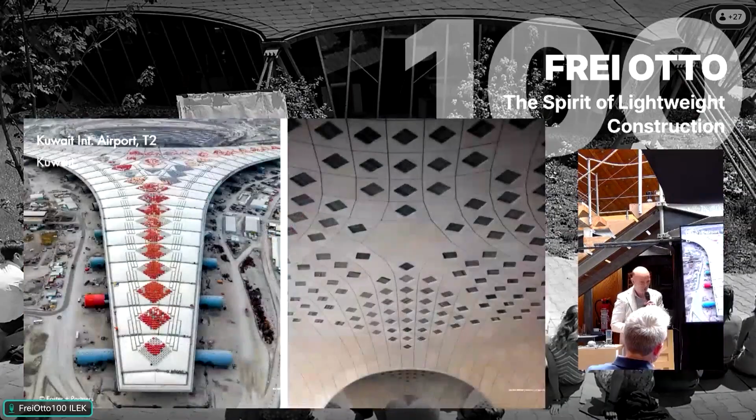And that was the basis for the next generation. The next generation is a parametric design from Foster and Partners with a pretty big shell roof, and I think we all agree in this space, or most of us at least, that shell structures are a very, very efficient system.

One of the issues about building shell structures nowadays is the formwork and the scaffolding on top of the formwork. So here we don't have scaffolding, just adaptive formworks. There's a big effort in parametric engineering up to fabrication next to the site. So the 37,000 panels of concrete, this time 16 centimeters thick, and this shell has a 100-meter span. There's a trick about it I'm going to tell you right away.

They've been produced right next to it, so this is a zero-kilometer fabrication. The shop has already been dismantled, you cannot see it anymore. The concrete structure is complete, no waste out of the formwork, just an adaptive hydraulic cylinder generating the form. It is economic for that kind of building.

Now, of course, we can argue and question, is that a one-of-a-kind structure? I think it's something that can be discussed later on. Can we reduce the level of complexity and bring it to other kinds of projects? I believe yes. But these projects have the legitimation, because they allow us to develop solutions and methods that can later be reduced and applied to simpler things where there isn't the frame, at least not the financial frame, to deal with that. We didn't have the time frame to make that much development. So this is just to provide the background and the link to the practice.

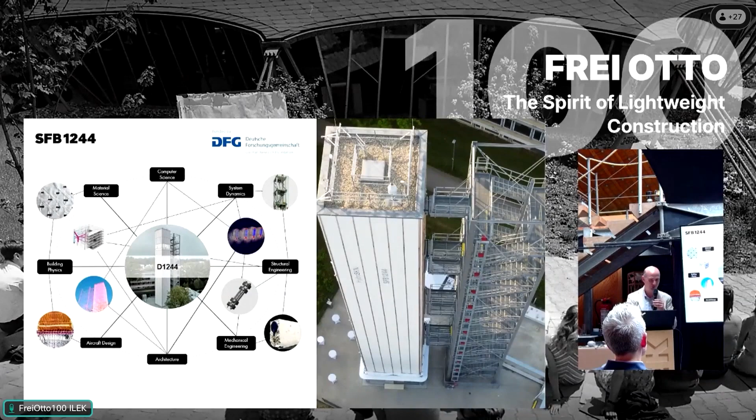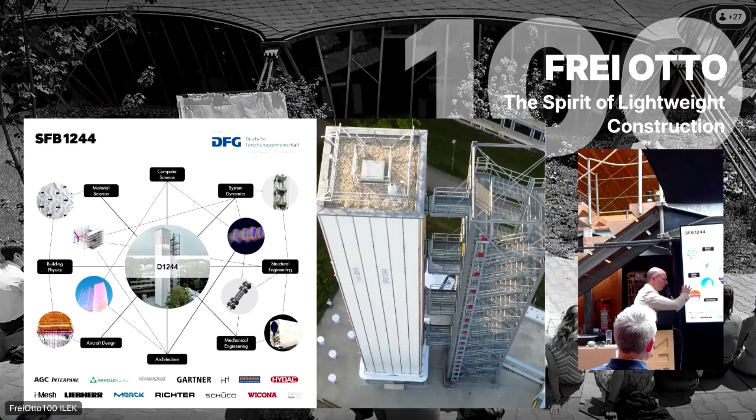It's important also to outline the relevance of the network. And beyond that, it's important for me to outline the relevance of the industrial partners in this, which is a fundamental research project—usually something you wouldn't show to the DFG, because that would suggest you're not doing fundamental research. Now, this is something I'm willing to challenge and question, because it is possible to do fundamental research and still have an association with industrial partners to speed up the transformation and transfer of ideas—not all of them, but part of them—into practice. So it's great to have all the different stakeholders on board.

Now, it is a technological project, but to me, the tower—which is, as I was saying before, an IBA selected project—is much more than just the development of technologies or methods. It is a paradigm for how we can make our architecture much more transformative.

And the great thing about this design is that we can take down every single element—a column, a slab—they are made out of wood, a facade made out of textile. I'm stressing intentionally the fact that we are working with different materials, because I think it is essential to my way of understanding lightweight, today and tomorrow. And by doing that, we can keep transforming this tower. So it's a building which is evolving over time.

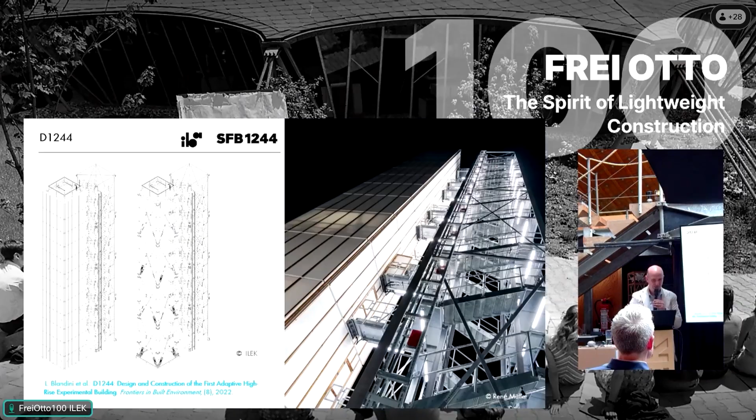When I started here five years ago, it was looking more or less like that—one year later, to be honest. And you've seen yesterday, it's much more than that now. It's starting to get populated with different skins, and every floor has a different topic. Now we are discussing with Jenny about the seventh floor, for instance.

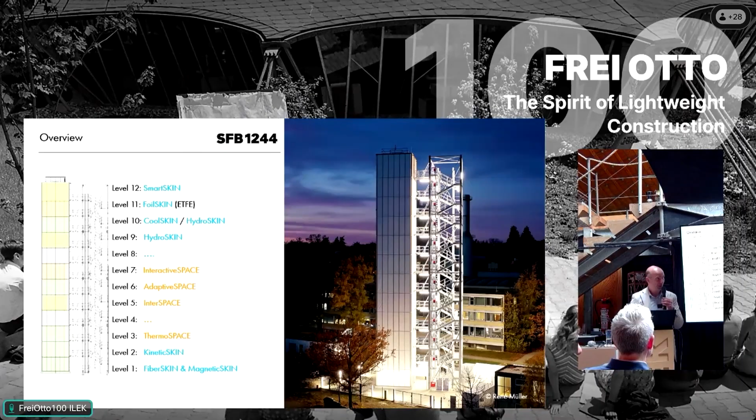And the idea is to have a catalog of different solutions. But beyond that, the idea is to show how plural and transformative our architecture should be. So once again, I'm quoting—it's not about a style, it's about an approach to the way we understand architecture. And we do like to involve our students in this kind of thinking.

So one of the first projects we did with our students—and we do like to have architecture and engineering students together, I still believe it is key—was to say: now we have one floor of facade, 60 square meters textile, we have timber, what can we do with it? And I think most of you have been enjoying the catering outside.

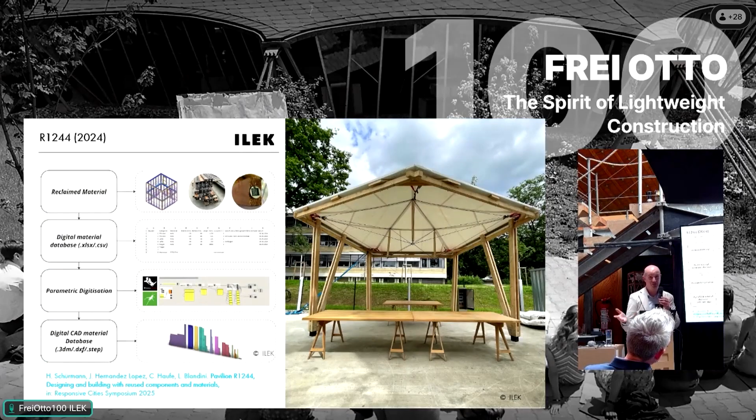And so this is what we developed together with the students—no costs, just brain and a bit of time and creativity. This is essential, of course.

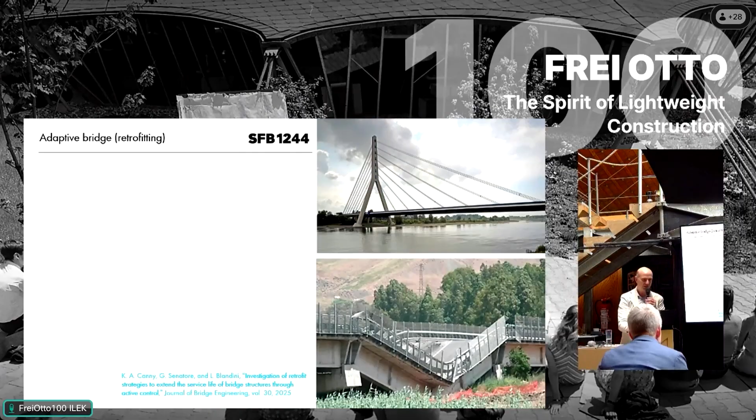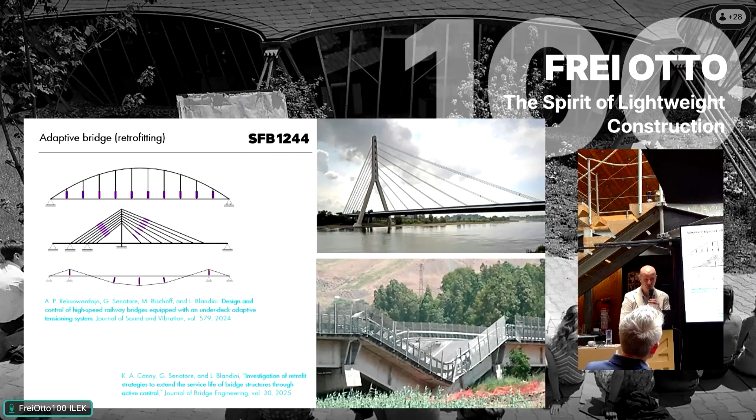And if we look into other possible areas of application of this approach, then of course we have to look at infrastructures as well. If we think about bridges which are collapsing, or bridges coming to the end of their life, then the ideas of monitoring real-time behavior of the system, and manipulating the forces and structural behavior, can apply pretty well into this realm as well. So this is also part of our work.

Now, this was about what we do and what we are keeping on doing in terms of adaptive structures. But we want to focus also on adaptive skins. And there are several reasons why we are doing that. Because if you look at—first, it is the background of my personal background—the tradition of the space over the last decades.

But secondly, it's about the impact of structures and skins in the way we use resources, in the way we interact with people. And that's at the end of the day what it's about.

The question is now, what kind of skins are we looking for? Are we looking into skins which are stiff boundaries between inside and outside? The term porosity has been already used, and we both have been discussing that. To me, skins have to be porous, but also engage resources and the natural environment. There's been discussion about whether we are part of the natural environment. I believe yes. And how do you engage the resources?

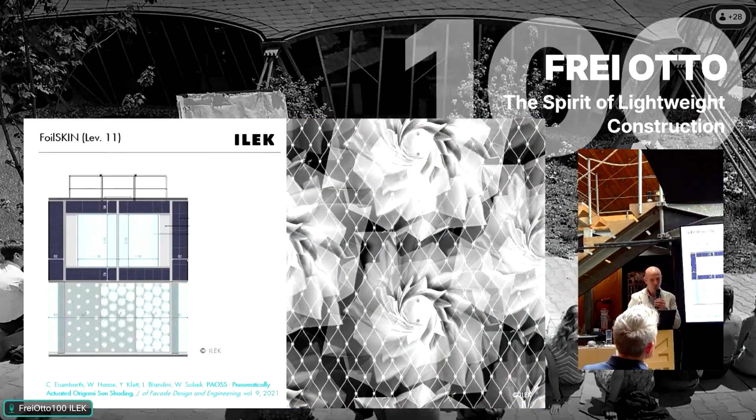So we look into adaptive ways of reacting to solar radiation. We look into ways of changing the forms of our elements to raise the level of harvesting energy. We look at changing the inclination of the louvers as a way of reacting to the comfort needs of people and addressing their glare needs.

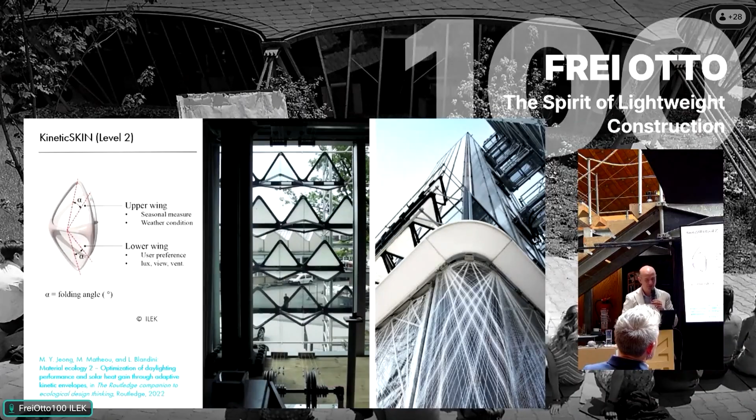Different aspects are brought together. And we look into ways how we can use this dynamic character of the skins in a playful way, having people touching the skin and feeling there is something happening there. So there should also be a level of fun in doing this kind of work.

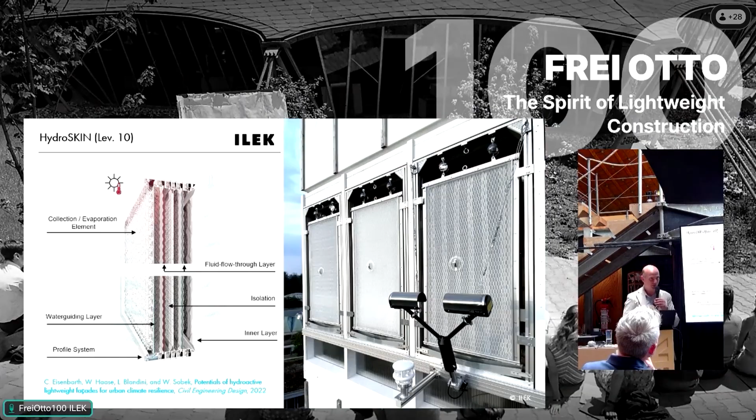And we see rain as a resource, so with the project Hydroskin we collect rainwater, and we can use it in a decentralized way. So we don't have problems with canalization, and we use the resource. Then through evaporative cooling, we can cool down the environment—a skin which is really in an osmotic behavior between inside and outside space.

And we explore these ideas further with our students. These are just a choice from our booklet out of our ILEK lab, which is in a way our way of addressing the research questions in a design way together with the students. I think it's important to acknowledge that and the relevance of it.

So these are the two main fields related to adaptivity. And now this image is not that far away from you, Jenny—it's not a coincidence that both of us are at the end.

And the question here is about the third field of research: mineral materials. As I was saying, we don't commit to one single material. However, we have a commitment to mineral materials just because they are so widely used in practice—if we change our way of dealing with that, we have a much bigger impact. That means we bring together the idea of lightweight in an extended way and mineral materials, and we engage them in a different way. That's the target of the third field of research.

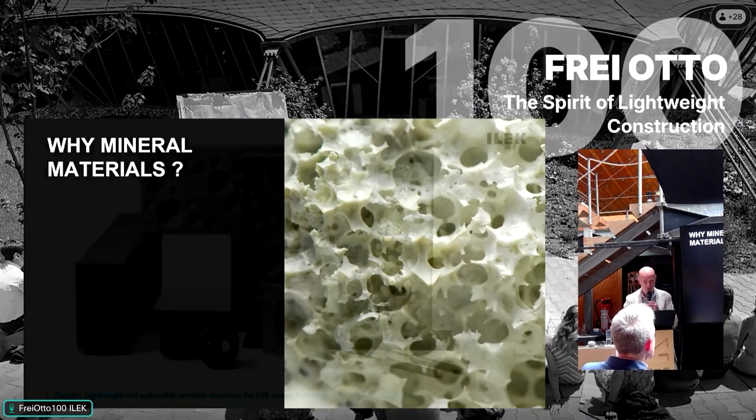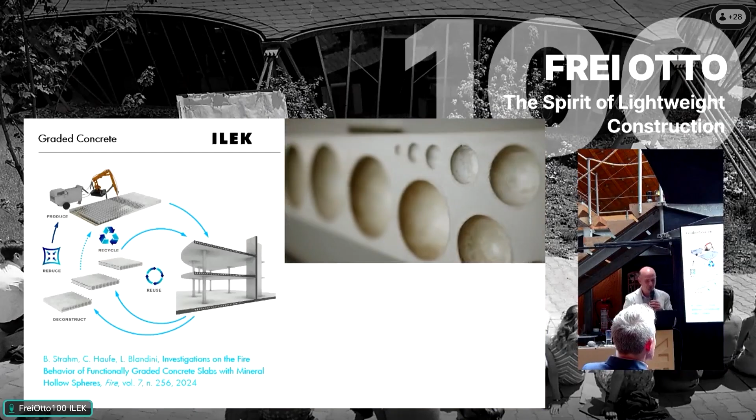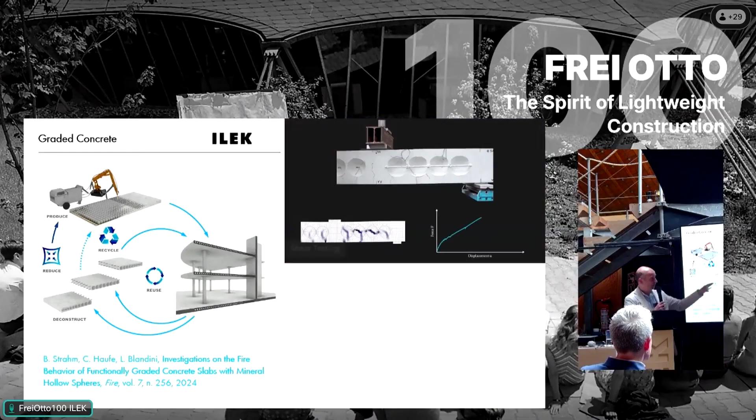And so we use different technologies. I'm bringing now the infra-lightweight concrete technology, which has been developed before my time by Werner Sobek, to the next level. Out of these hollow spheres, which you can see at the entrance and take in your hand, we've made all the checks to be sure this technology can now be used in the cluster building that Achim is responsible for, where we take care of the concrete part. By doing that, we address the reduce issue and the recycle issue, because these hollow spheres are mineral based.

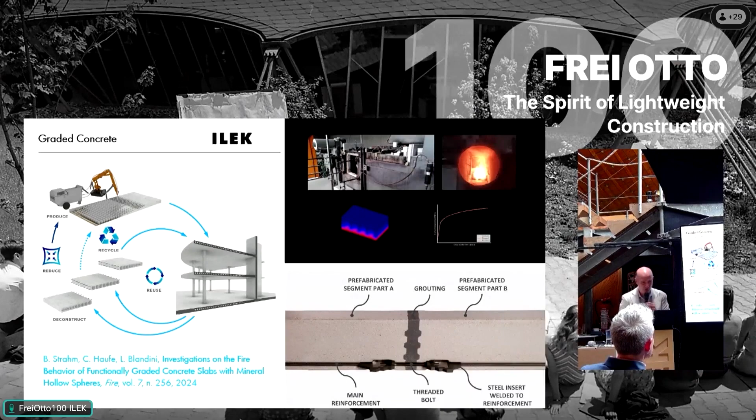But is that enough? It is not. We should keep considering ways of increasing the level of reuse of concrete, which would mean not crushing it down and recycling some of the components, but rather cutting it down, generating segments out of it, and bringing them back together. You may see a certain reference to the work we did in Kuwait, but this time it's not about a shell, it's about generating a segmented slab system and solution.

It's a PhD research. At the end of the day, we will hopefully very soon see these two first levels done, executed, and then we can show how that transfer has really been working in vivo. You said, Hakim, yeah? It's working well.

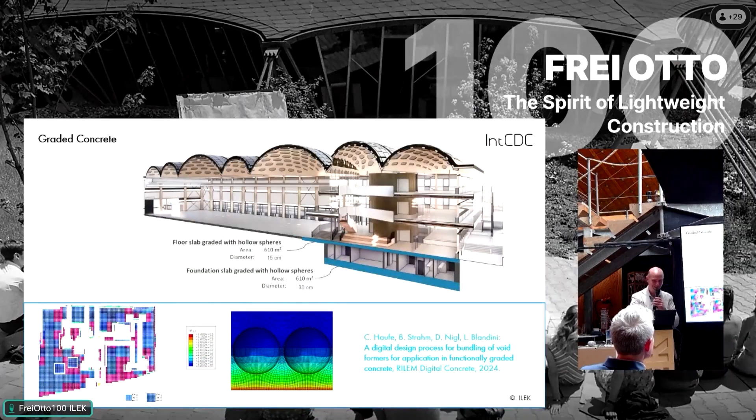And behind that, it is about making this porosity visible. There is a beauty about that, and concrete mineral materials can actually reach this level. And of course, in order to do that, we have to engage

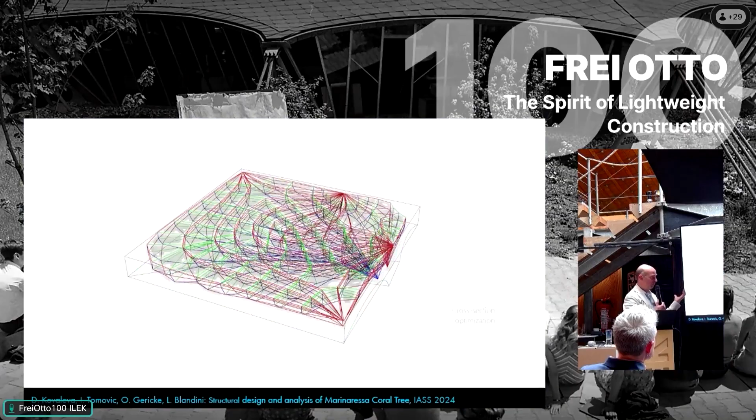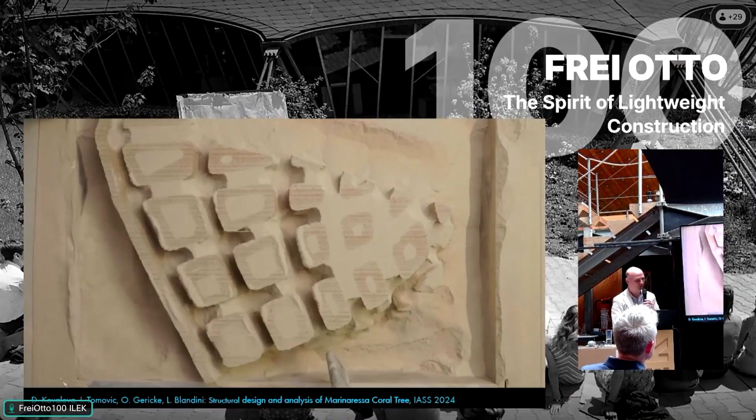technology and methods of our time—topology optimization. And it's also important that we find ways of using new sustainable formwork. In this case, it's sand—this was Daria's PhD. And in this case, we use carbon fibers.

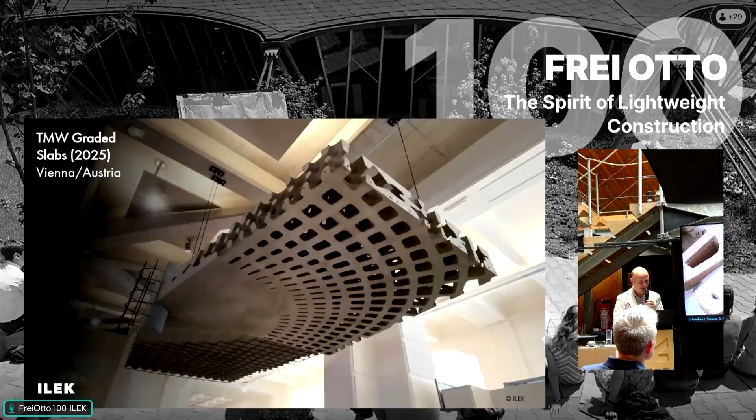And then we've been discussing the next generation. The Marinaressa was shown two years ago in Venice within the frame of the Biennale. Now the next generation is shown in Vienna at the Technical Museum, showing both technologies I was talking about, but also showing something on top of it: the use of a different kind of reinforcement made out of basalt. That means we need something for this porous system which has more of a fiber character—a link again to the fiber idea, in a different way.

At the end of this, we are looking — and now biology is coming back, there's going to be a bit more about that — we are looking into ways of substituting cement with mineral-based material, because cement, as we know, is the one component driving CO2 production. So what about if we have bacteria generating the binding character, in this case by creating calcium carbonate crystals?

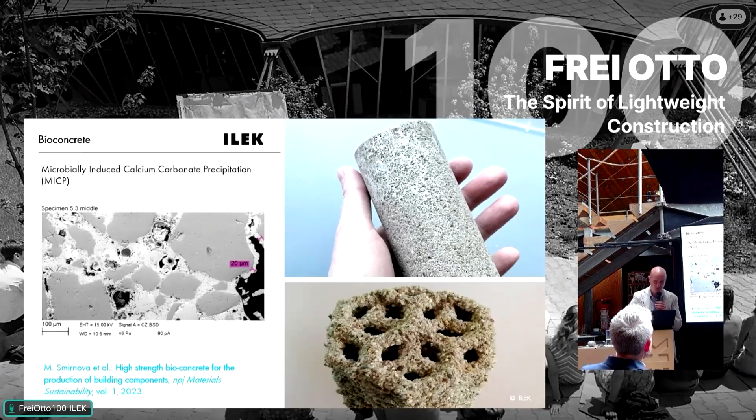And now, of course, you probably expect from me the question: what is next? What is the agenda for the coming years? It's been 5 years I'm here. I still hope I will have further years to develop certain things.

When I was thinking about the future, which is pretty unsharp in my mind, I decided to take this picture — actually a picture taken from the shell about 21 years ago, when I was experimenting with the optical qualities of these double-curved glasses. To me, what comes next is related to my experience in Brussels.

It is about working much more with existing buildings. It is about finding ways of avoiding these buildings being torn down. What you see here is actually the building down there, and it was intended to be demolished. They decided not to demolish it for several reasons.

We said, okay, why can't we make an experimental work out of that and develop new skins that we can bring to the existing building, upgrading it in such a way that in 20 years, 30 years, you can dismantle it again without generating any waste. So there's a link to what I've been presenting before, and this is actually the vision behind it — no waste generated, like a snake skin, and this is actually where we want to go.

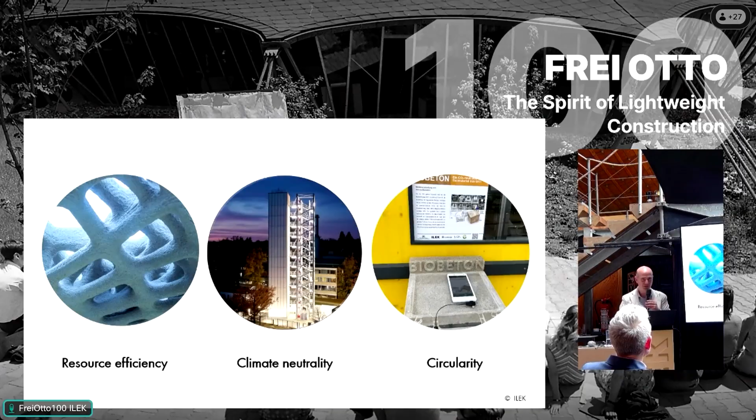And of course, this is a paradigm of the way I understand the role of the ILEK also in the future, as we engage collaboration with Jenny, as we engage collaboration with Mariana. I see, out of the challenges we have to face — and I'm going to show this picture once again — that we have to build a stronger network, because facing all three together is a pretty ambitious agenda. So everybody interested in working on a light ecological footprint is, of course, invited to join forces. I think we need all of our brains and capacities.

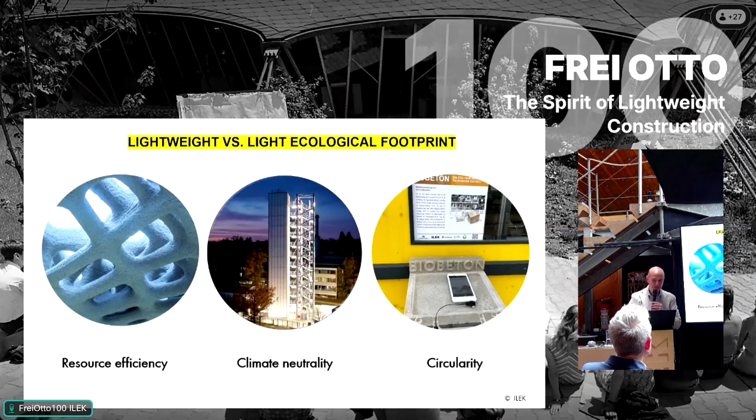And we need, and I want to outline that, we need of course a motivated team. I believe you've already experienced how motivated the team here is, joined also by the team from ILEK. I just want to acknowledge that all of this I've been showing is teamwork. The idea is to expand this into a network with even more persons. I want to thank everybody who is willing to go this way with us. Thank you.